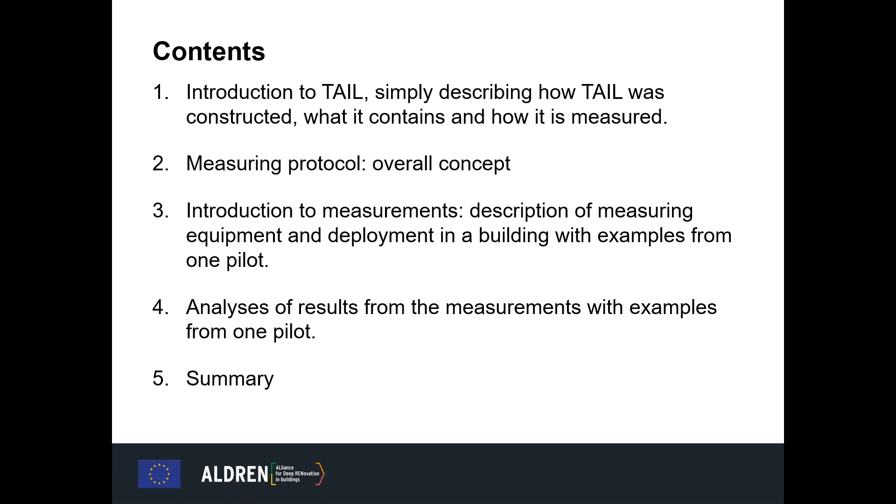Let's get going with the background. Why are we even thinking about measuring indoor environmental quality when performing energy renovations? I think energy renovations at the moment focus basically on energy. And because there is a very low rate of energy renovations, for several possible reasons, there is a need for additional incentive to perform those energy renovations.

These are crucial because in order to convert our economy into a green economy, the number of renovations needs to be much higher than it is at present. So one of the elements of different tools that can incentivize and provide rational justification for performing deep energy renovation is to include the measurement of indoor environmental quality when performing deep energy renovations.

One reason for that is that indoor environmental quality, when rated, can later be used to perform economic calculations of additional benefits that are not related to the benefits obtained when energy renovation reduces energy use. So there is certainly a need for inclusion of indoor environmental quality measurements in the scope of deep energy renovation.

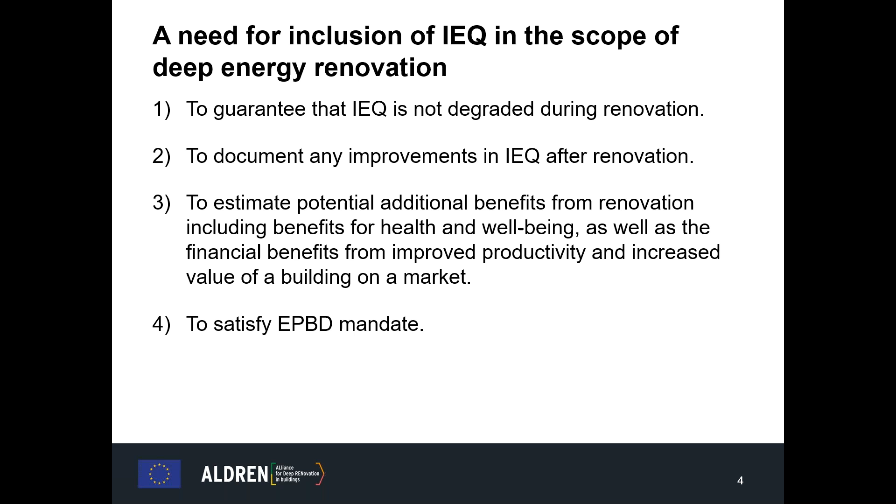It is actually included in the directive. This is the part that refers to this element: Article 2A on long-term renovation strategy. Point 1 states each member state shall establish a long-term renovation strategy. The last sentence says each long-term renovation strategy shall be submitted in accordance with applicable planning and reporting obligations, and shall encompass several elements, one of which, Article 1G, states an evidence-based estimate of expected energy savings and wider benefits such as those related to health, safety, and air quality.

In other words, the formulation in the amendment to the EPBD directive states that part of the energy renovation process should document benefits other than those related to energy—specifically those related to health, safety, and air quality. Those benefits are associated with indoor environmental quality and other aspects, but we are focusing here on indoor environmental quality.

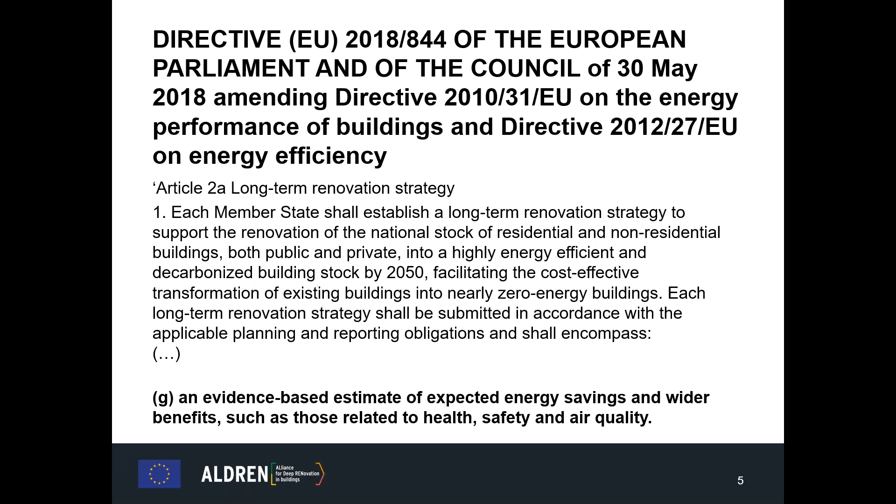So how to measure indoor environmental quality in buildings? In order to propose a methodology to measure indoor environmental quality, one has to overview and see what are the currently applied methods for measuring indoor environmental quality. This is not a new topic, because such measurements have been performed for years, using different techniques and parameters to characterize the quality of indoor environmental quality.

So one way to rate indoor environmental quality would be to refer or reuse the existing methods that are used for measurements of indoor environmental quality. In order to identify those methods, a review of certification schemes and standards was performed to find out the methods in use, as well as the indicators proposed to characterize indoor environmental quality.

On this slide, you'll see the green building certification schemes that were reviewed, as well as standards that were reviewed, and projects which refer to this topic, and also research articles.

And of course there may be others that are not in use for different reasons, but we don't know whether there will be any others that could also be used. So basically what we say from this review is that there are nearly 100 different indicators used to characterize indoor environmental quality and its components.

And there is no standard method for rating indoor environmental quality. We know how to do it, but we have not standardized it. We have not produced a metric or an index that can be used universally across different projects or standards. Not only this, the different green building certification schemes which have a component of rating indoor environmental quality also use different types of indicators to characterize it. Not always - some of them match and some of them don't.

So in our project, the only way to advance was to propose and suggest an index that can be associated with deep energy renovation and used to rate indoor environmental quality in a building prior to and after deep energy renovation.

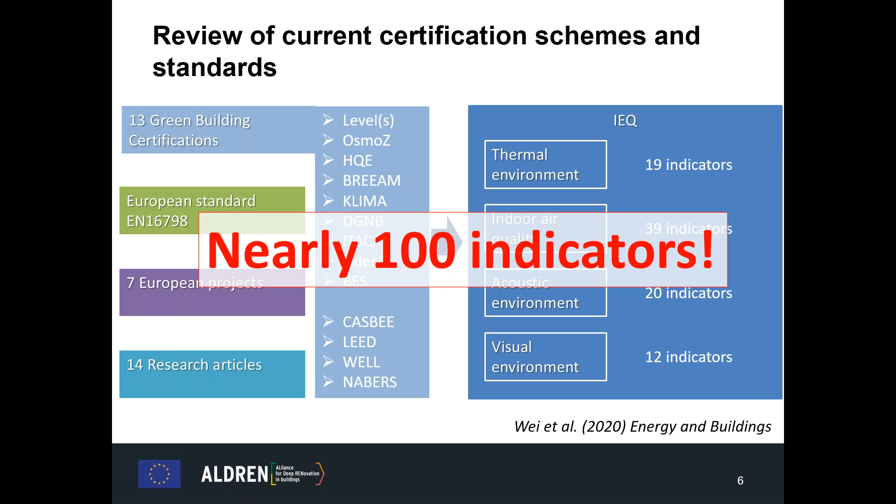And we proposed the index, which is called TAIL. Together with that index, we proposed the entire protocol and method on how this index can be used in connection with the measurements of IEQ in buildings during the energy renovation process taking place in a building. Later on, during this training session, you will learn how this index can be applied.

But let's start first to introduce the index. The index is composed of 4 letters, T-A-I-L, which are nicely formed in the word tail. And the reason for that is not accidental - it's because they describe the 4 components of indoor environmental quality: thermal environment for T, acoustic environment for A, indoor air quality for I, and luminous or light environment, or visual environment, for L.

So the index shown on the right is composed of those 4 components, TAIL, just to show the quality of those components. But of course, what we are mostly interested in is the overall quality of indoor environment.

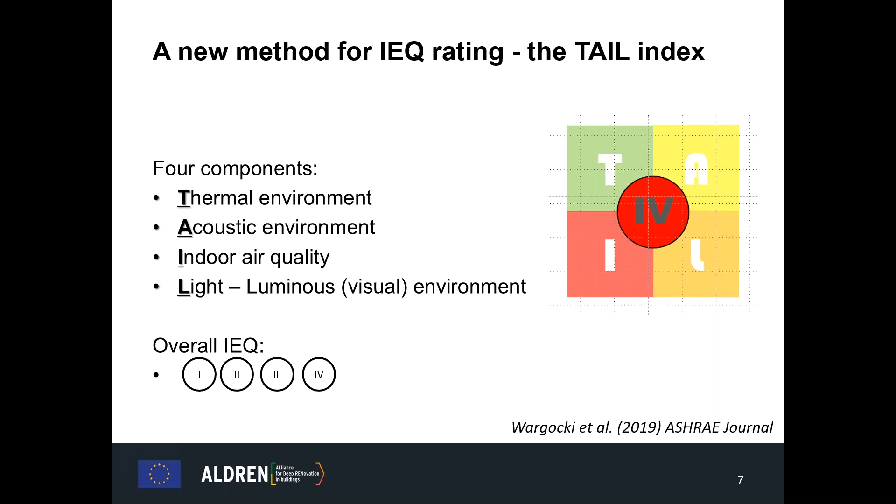This overall quality of indoor environment is presented in the middle of the index by the Roman numbers 1, 2, 3, 4. How the Roman number and how the components and the colors behind them are determined will be discussed in a moment.

So each component is described by the colors green, yellow, orange, and red, and the overall quality of indoor environment is described by the Roman numbers 1, 2, 3, 4. Green is the highest quality, and red is the lowest quality. 1 is the highest quality, and 4 is the lowest quality.

In order to make a reference to existing standards, we used the categorization of the quality of those components and of the entire indoor environmental quality that is used by the standard EN 16798-1. That is one of the standards supporting EPBD. So just to make a connection to the EPBD and also to existing standards, we used that categorization.

So there are 4 categories that are characterized, described, or defined by this standard. Category 1 is the category with high level of expectation. Category 2 is normal level of expectation. For the indoor environmental quality, category 3 is a moderate level of expectation. And category 4 is low level of expectation.

Those categories 1, 2, 3, 4 correspond to green, yellow, orange, and red. And they are applied for the components, TAIL, and for the overall indoor environmental quality. So this is the concept, this is how it should be characterized, the indoor environmental quality and its components.

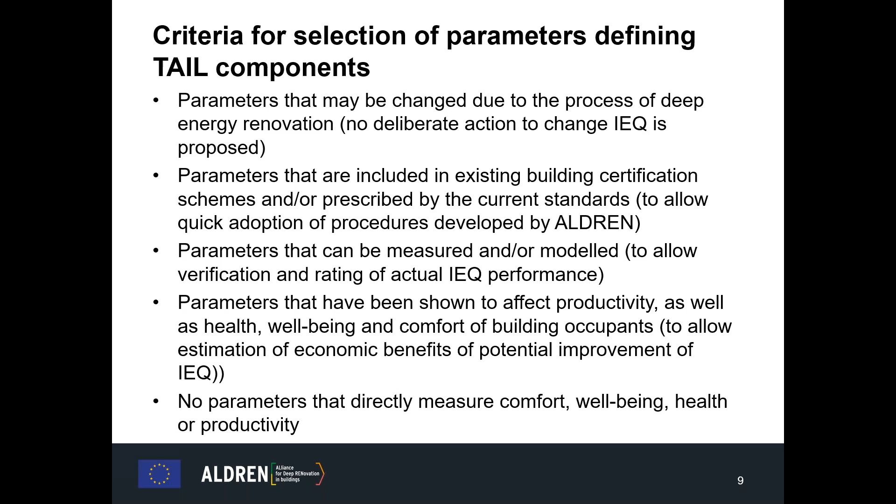It has been decided deliberately at that time that no subjective evaluations of the occupants of the buildings should be used to characterize components of TAIL. So no parameters that directly measure comfort, that could be subjective rating of occupants, well-being, health, or productivity. Those were not considered to be included in that version of TAIL that we developed.

And the answers could be very simple. Indoor temperature and operative temperature in buildings that are renovated are very close to each other. And air velocity is not a very simple measurement that can be applied in many buildings.

For component A, characterizing the acoustic environment and acoustic quality of the space, we use noise level in dBA, a sound pressure level. The debate can be whether this is a valid measurement. Yes, it is, because it's prescribed by the standards. We understand other parameters could also be considered, such as reverberation time or speech transmission index, but those are not well established in standards, and the methodology is too sophisticated at this moment to be applied in buildings.

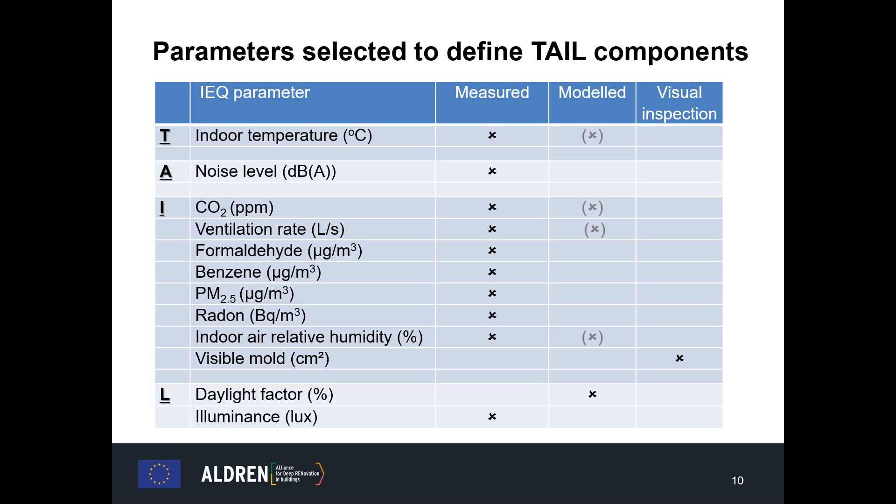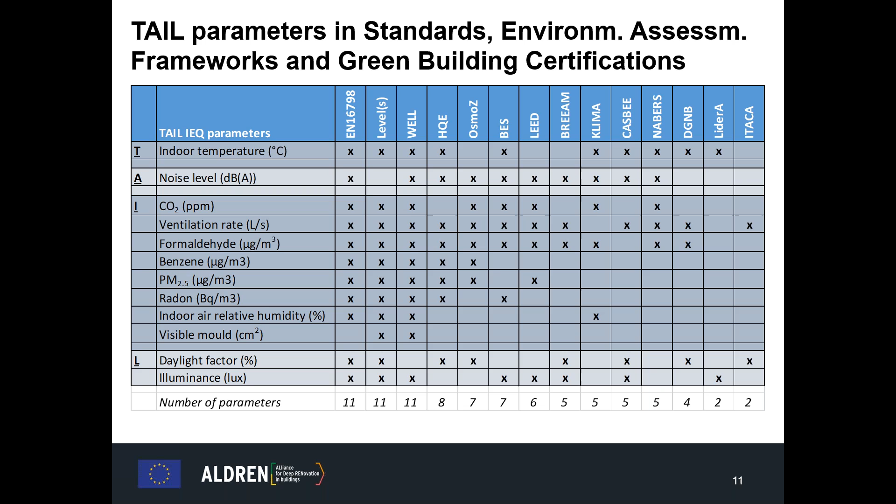The selected parameters are included in standards and environmental assessment frameworks and green building certifications. This slide shows that 11 of those are included in the EN standard mentioned earlier, and in Levels, the sustainability tool developed by the European Commission, and in WELL, and several are in different certification schemes. So the criteria, including parameters well represented in other certification schemes, is fulfilled here, and also suggests that by calculating tail or by certifying buildings using certification schemes, the tail can be automatically determined.

Each of the 12 parameters is assessed according to the 4 categories introduced before, and from their category level, the level of quality of each component is determined. How this is done will be presented in part 2 on the measuring protocol and overall concept, introduced by Corinne Mandin.

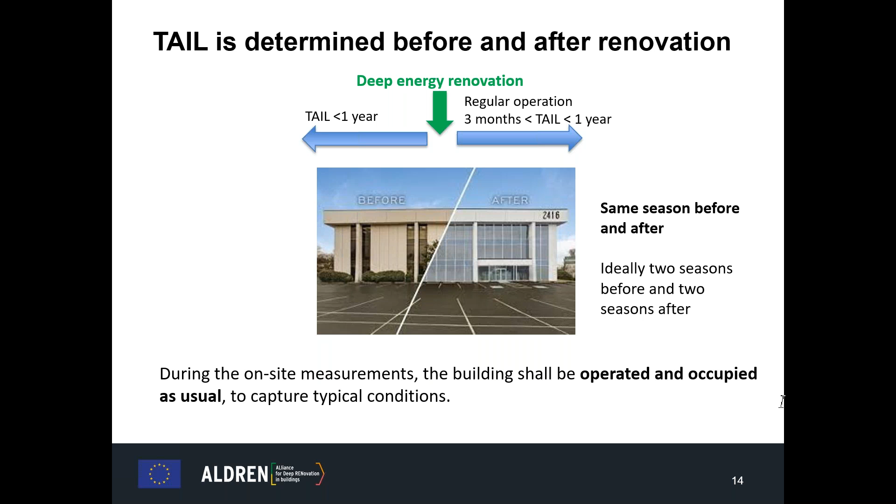Now, a few elements about the number of sampling locations. Of course the building can be very large, so you cannot measure in all the rooms. The number of sampling locations is a compromise between capturing representativeness of the whole building and technical and economic feasibility. Technical, because you may not have the devices and equipment to instrument many rooms, and economically, we cannot measure everywhere. So we recommend measuring between 2 and 10 rooms in the building, whatever the size. But check that if you have 10 rooms, they represent at least 10% of the occupied area - meaning the office floor area for offices, and the guest room floor area for hotels.

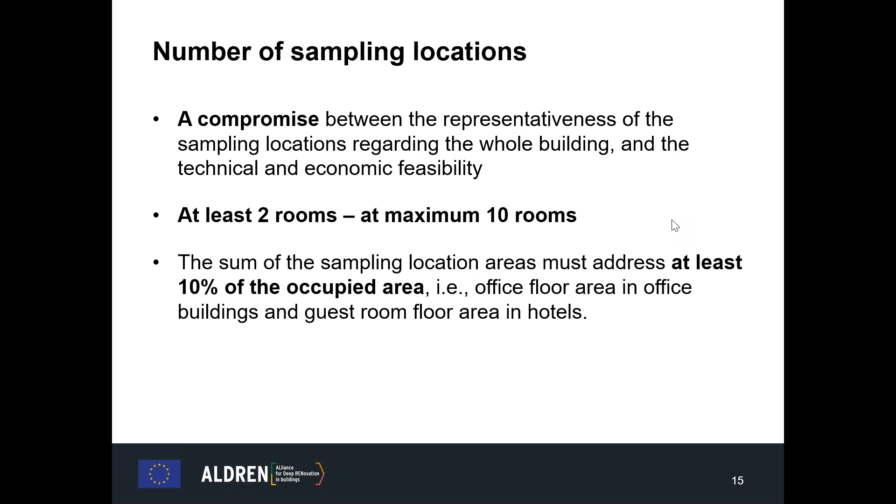Regarding the choice of sampling location, since we have a limited number of measuring locations, we recommend not measuring in rooms that are not occupied permanently. So avoid the lobby in hotels, avoid meeting rooms in office buildings. Do the measurement in offices, in workplaces, in office buildings, and in rooms in hotels.

When choosing different locations, you must keep in mind that you need diversity in the rooms. You have to decide to measure at the lowest occupied level and at the highest, then choose intermediate levels. Choose different orientations, because depending on the orientation - facing the street or the garden - you have different influences of light, noise, or air pollution.

Please pay attention to have different orientations for your rooms. Choose also different types of indoor spaces - meaning different indoor materials, different ventilation systems, if you have different types of spaces in the building. If you have single offices and open plan offices, be sure you have a mixed type of rooms in your sample. And once again, the rooms you choose must be normally occupied during the measurement - avoid any rooms that would be empty during the measurement.

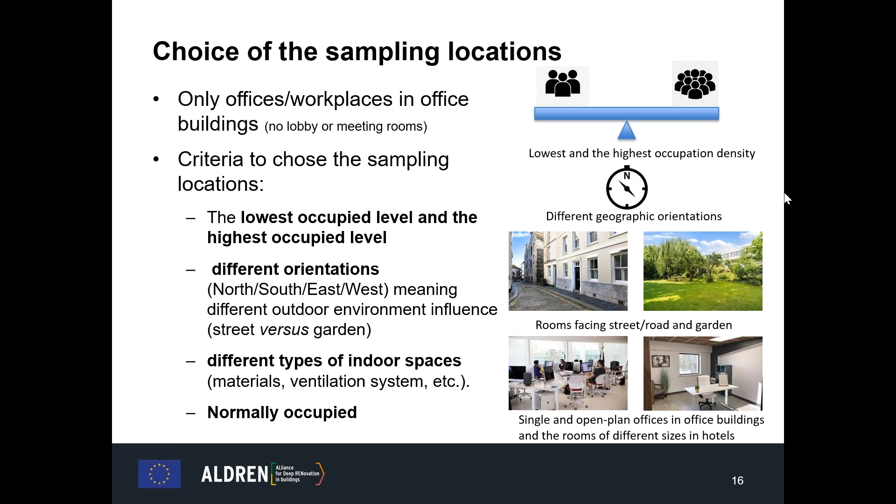Regarding the duration of sampling, it depends on the parameter. It's at least one month for temperature and relative humidity, to have long-term measurements. Radon must only be measured in buildings located in radon-prone areas - if you have such a building, the measurement must be done during 2 months. For the other parameters, this is one week, from Monday to Friday in an office building. And in a hotel, it's from Monday to Monday, Tuesday to Tuesday, or Wednesday to Wednesday, etc.

So keep in mind a few things. It's always better to visit the building before the measurement, to choose the different sampling locations, to discuss with the building owners, and if possible, take pictures to remember the places you've chosen and the rooms, for when you'll interpret the results if needed. Before going on site, also collect practical information - the access to the buildings, if there's a car park or if you need to be on the streets. Ask for a plan to clearly mark the selected measuring locations.

And when you are on site, during the measuring week, collect as much technical information as you can - the type of ventilation system, the type of heating system. Record if you sample small offices or open plan offices, because you need this information for the calculation. Ask if there was any special event recently - a fire in the building, new furniture introduced, new flooring - because this has a strong influence on indoor air quality or on acoustics. You must have this information to correctly interpret your results.

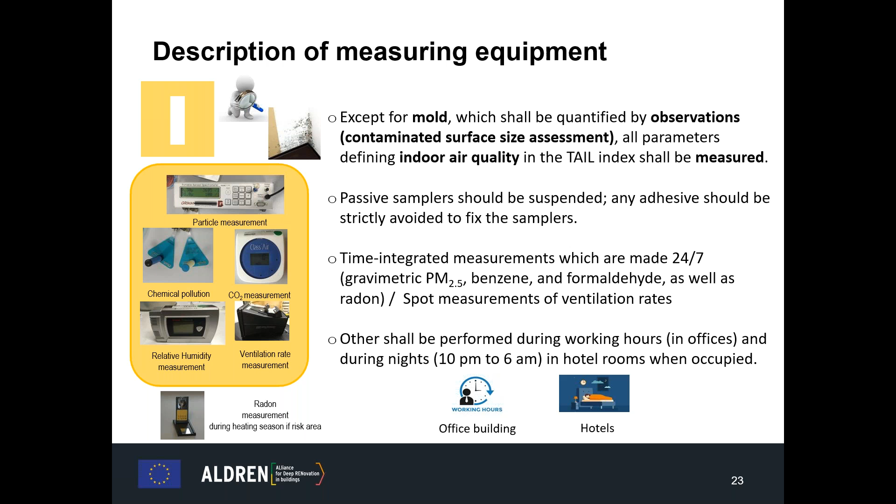The measurements of light will be done with a lux meter. We will measure illuminance, which refers to the total light delivered on a surface by either an especially installed system or through windows, with daylight at the same time.

We will use calibrated sensors with an accuracy of at least plus or minus 3 lux. We will perform spot measurements, or we can make continuous measurements. In case of logging, we recommend using a 1 to 10 minute logging interval.

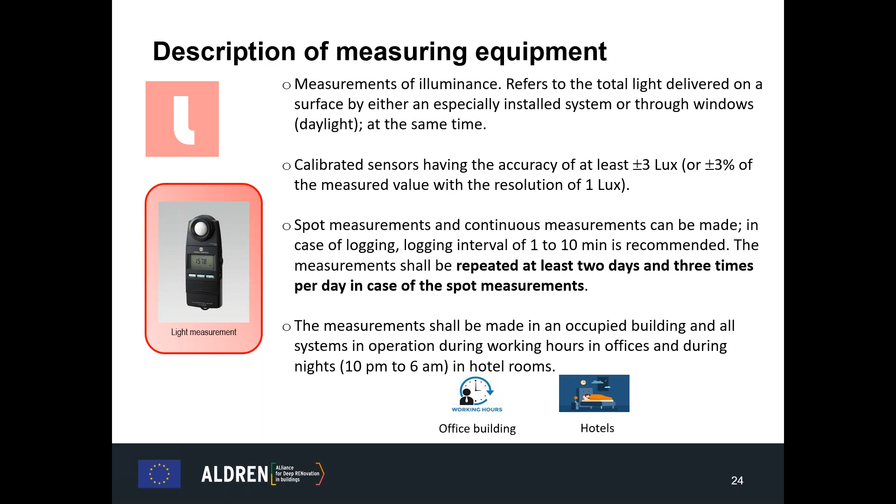These measurements shall be repeated at least 2 days and 3 times per day in case of spot measurement. As usual, we will make this light measurement during working hours in office buildings and during the night in hotels.

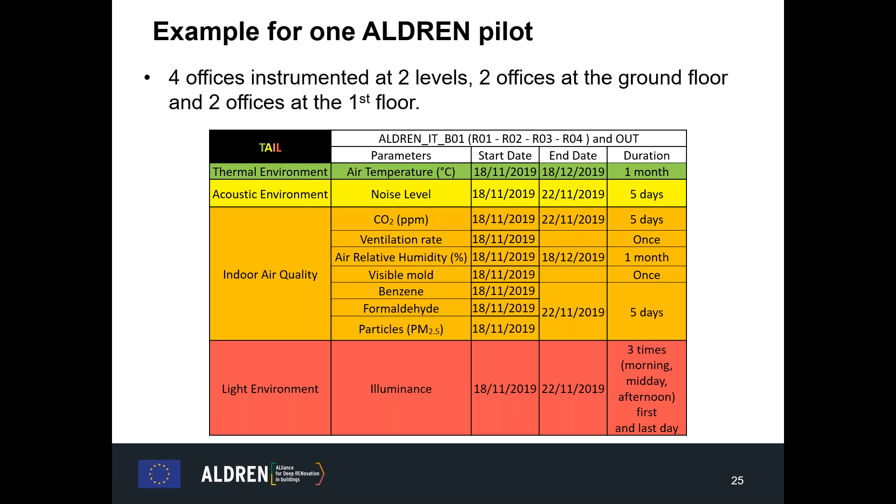For the light measurement, we will have 5 spots: 4 in each corner and 1 in the center of the room. We will perform the measurement with window blinds and without window blinds, and with light and without light, for example in hotels.

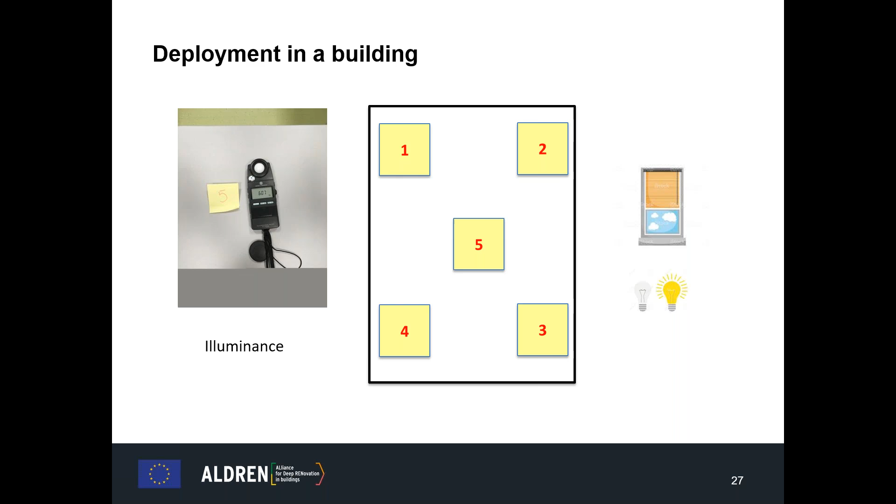My colleague Wenjuan Wei is going to show you the analysis of results from the measurements, with examples from one pilot.

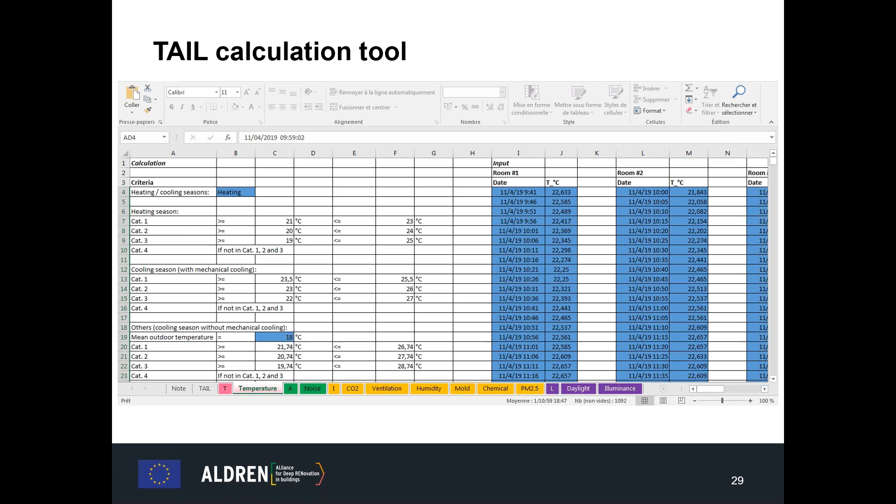The input data for calculating the TAIL index are the measured or modeled data of the TAIL indicators: indoor air temperature, measured using online measurements for 1 month; sound pressure level, measured online for 1 week; CO2 concentration, measured online for 1 week; ventilation rate, measured on the first and last day of the measurement week; relative humidity, measured online for 1 month; and visible mold, which is observed visually.

Formaldehyde and benzene concentrations are measured using passive measurements for 1 week. Radon concentration also uses passive measurements. PM2.5 concentration is measured online for 1 week. Daylight factor is modeled, and illuminance level can be measured on the first and last day of the measurement week, in the morning, midday, and afternoon.

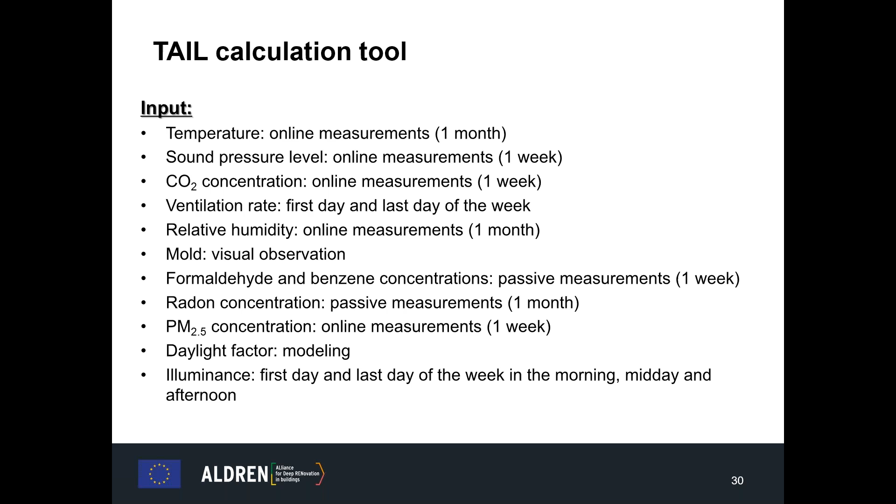Data during working hours in offices, from 9 a.m. to 5 p.m. by default, and during night hours in hotels, from 10 p.m. to 6 a.m. of the next day by default, should be used for calculating the tail index. Measurements of noise level should be performed in unoccupied spaces during working hours in offices. If the offices are occupied during the day, data between 6 to 8 a.m. and between 6 to 8 p.m. should be used instead.

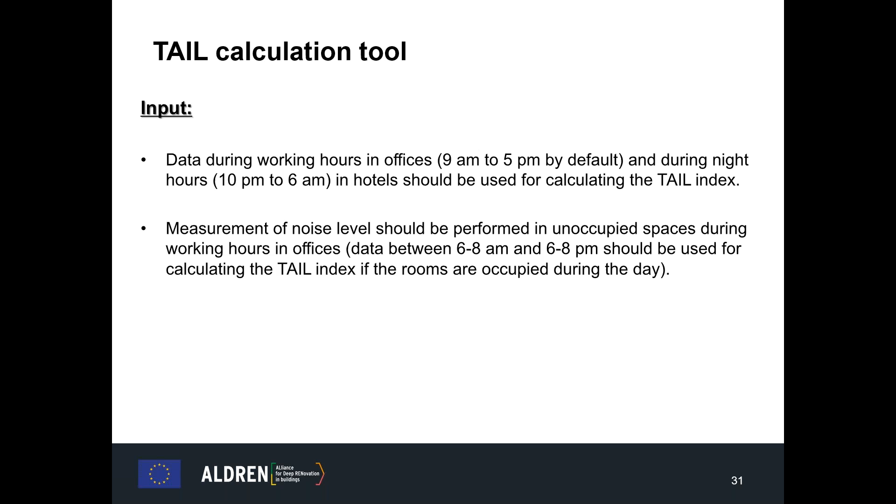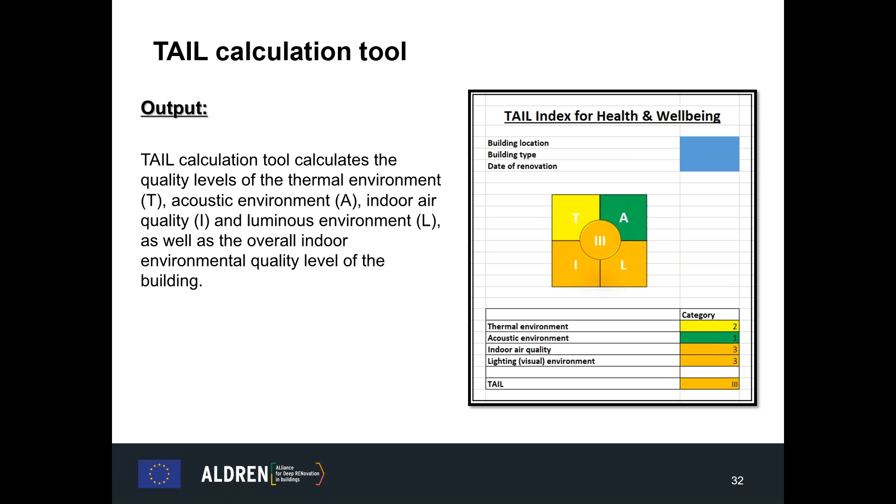The output of the TAIL calculation tool is the TAIL index results, as shown in the figure on the right side of the slide. The tool calculates the quality levels of the thermal environment (T), acoustic environment (A), indoor air quality (I), and luminous environment (L), as well as the overall indoor environmental quality level of the building.

I will show an example in the next few slides to explain how to explore the TAIL calculation results. The building used as the example is the pilot building introduced earlier, and the measurement was performed during the heating season. After filling out the input data for the TAIL indicators, the overall IEQ level of the building is red, which is level 4, as shown in the circle in the middle of the squares in the figure. This indicates the building has large potential for IEQ improvement during renovation.

The levels of the 4 TAIL components, T, A, I, and L, shown as the squares around the circle, are yellow, red, orange, and red respectively. They indicate the improvement potential of the thermal, acoustic, and luminous environments, as well as IAQ.

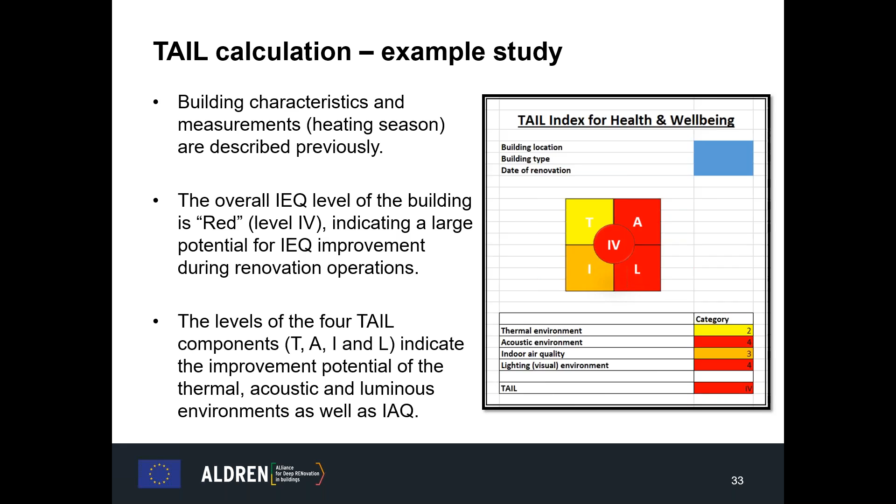The TAIL calculation tool allows visualizing the quality level of the indicators for each measured room. We'll start with the thermal environment. Indoor air temperature is the only indicator for the thermal environment, and 4 rooms were measured in this building. The thermal environment levels of the 4 rooms range from green to orange, suggesting that indoor air temperature varied among different rooms during the heating season under current conditions.

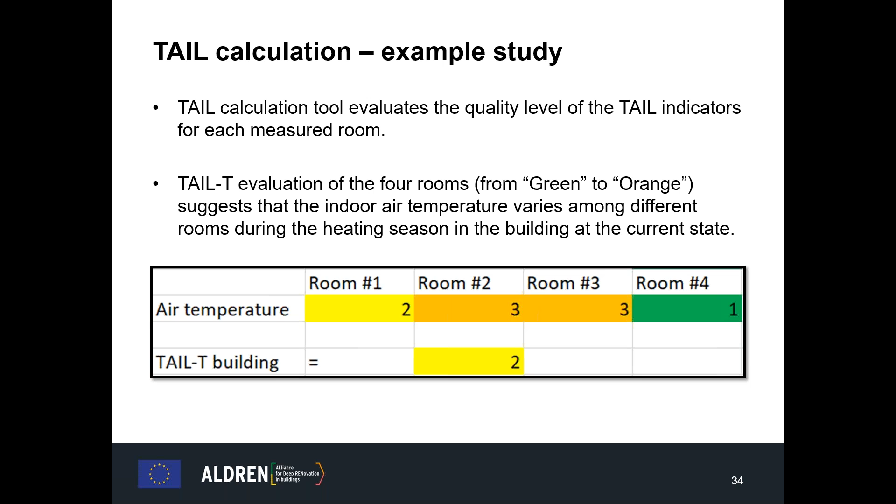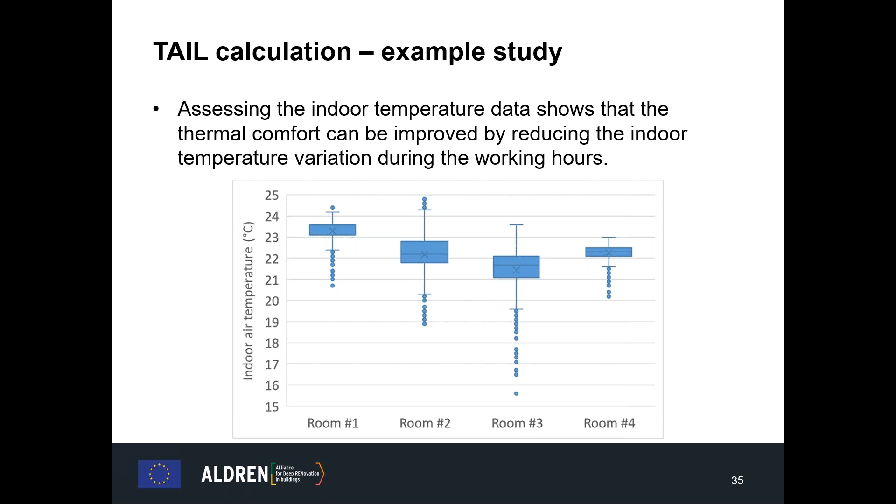The indoor air temperature data in the 4 rooms show that the temperature varies not only among different rooms but also from one day to another in each room. Therefore, thermal comfort can be improved by reducing indoor temperature variation during working hours.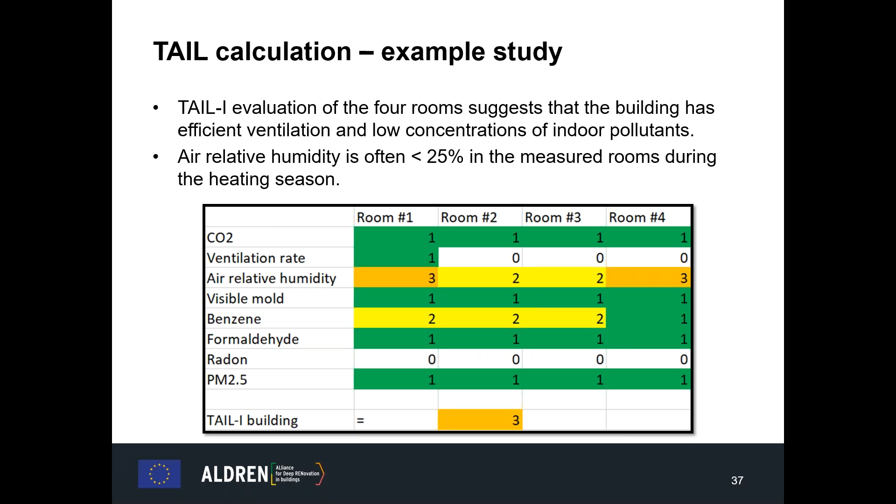However, the TAIL I level of the building is orange because the air relative humidity was often lower than 25% in the measured rooms during the heating season. It can cause dryness. The TAIL L luminous environment has 2 indicators: daylight factor and illuminance level.

Daylight factor was not assessed for this building because it is the only indicator that requires modeling, and this building is fully assessed based on measurements. According to the illuminance level, the luminous environment of the building is poor at the current state, because some rooms were over-illuminated and others were under-illuminated during the measurement period.

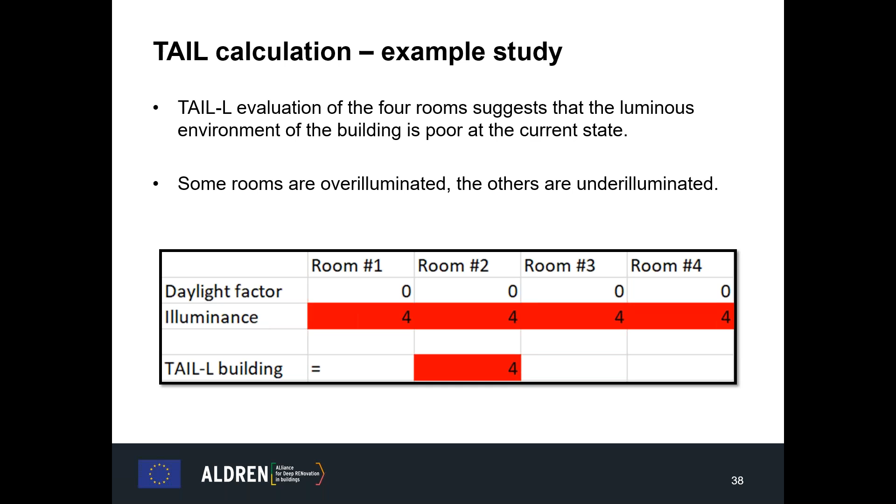And here goes the summary. Pawel, please.

Thank you, Angela. And thank you, Ruxala and Corinne. This is a time to wrap up the entire training session. So far, we have learned why we need an index for rating of indoor environmental quality. We have introduced this index and how it is built, what components it includes, and what parameters it includes. Also, we have learned the protocol for how to perform the measurements. We saw the instrumentation and the analysis.

In that short training session, we were not able to introduce in detail the ranges of parameters as well as the accuracy and precision of all the instrumentation. But we want to assure you that there is a protocol that has been developed, a very detailed protocol, and all these data have been carefully considered and included.

And I will be wrapping up, and I realize that we haven't told you one most important piece of information, but I will do it probably when we are wrapping up here now, about this information. So next slide, please.

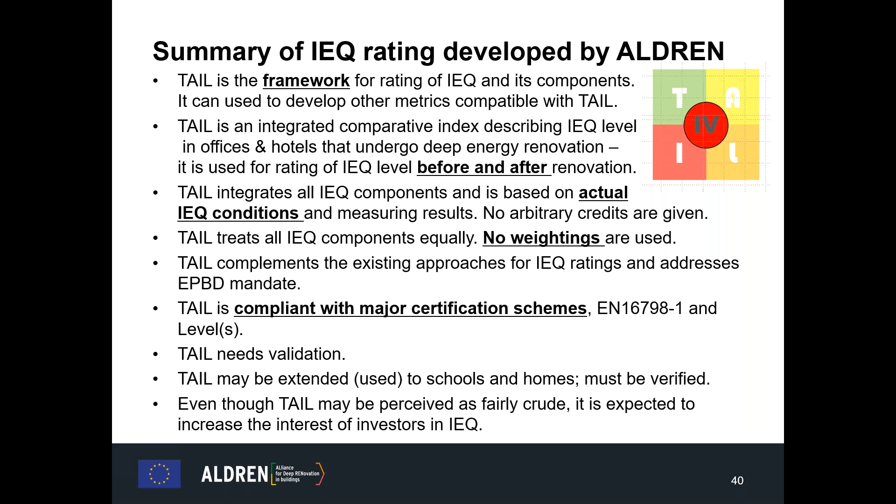So how do we see TAIL in the future? We believe there are three levels of how TAIL will be developed. In the short time frame, there will be validation of the current version of TAIL with modifications to the measuring protocol, maybe ranges of the parameters underlying it, particularly looking at the sensitivity of TAIL to detect differences.

That could be the second phase, the medium time frame: sensitivity to distinguish differences in indoor environmental quality across buildings, and also verification of long-term measurements and more sophisticated measurements. They're proposing a fairly crude and simple method of measurements, taken for a month, for a week, and at best in two seasons. The question would be whether and how much that would deviate from measurements performed over the entire year.

In this way, one would be able to establish the potential precision and accuracy of the rating of indoor environmental quality. So this is basically the medium time frame point - we need to think about precision and sensitivity, all aspects related to accuracy of determining the quality of indoor environment using TAIL. In the long time frame, many aspects of development can be considered. To me, there are three most important elements: extension to other types of buildings and also to new buildings, so not using TAIL only as a relative index, but also as an absolute index.